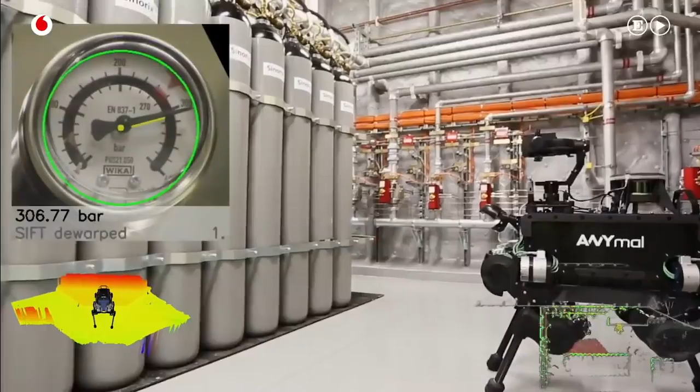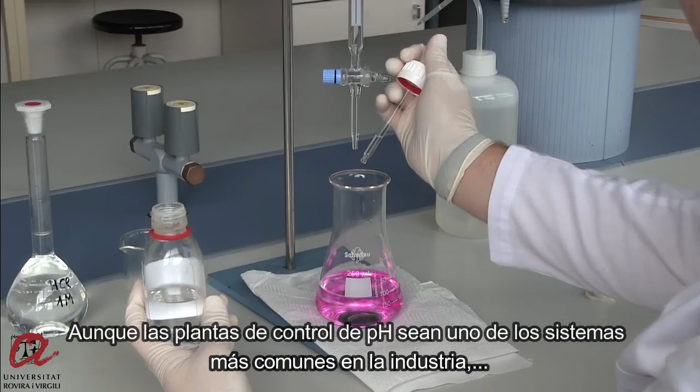Control engineering is characterized not only by its precision in assembling complex physical systems, but also by its capacity for simplification. Although pH control plants are one of the most common systems in the industry, they are also one of the most complex to control due to the high rate of nonlinearity.

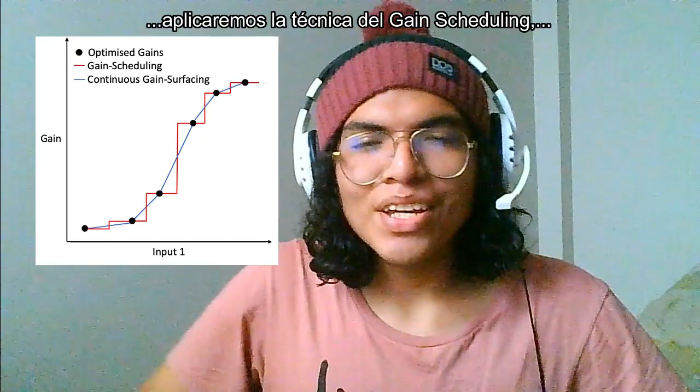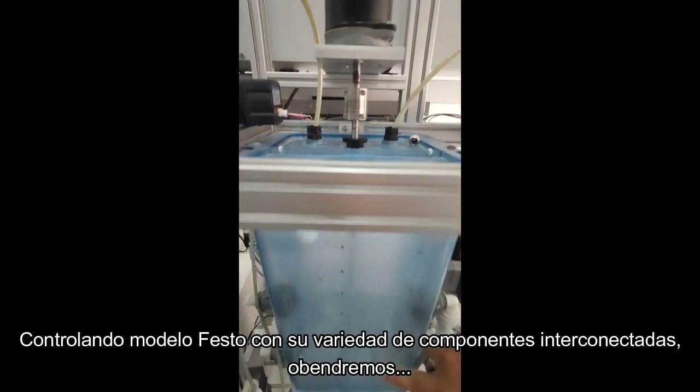Hi, I'm Axel, and in the present work we will apply the gain scheduling technique used for nonlinear systems. We will design a PID controller that allows us to work in any range, by controlling a Festo prototype, which with its variety of interconnected devices, will let us obtain this particular model. But before everything, what is gain scheduling?

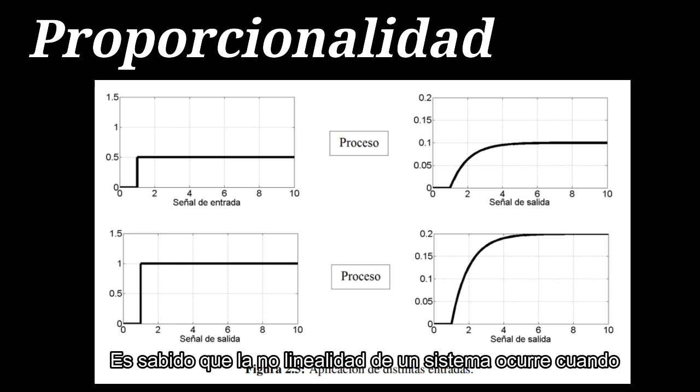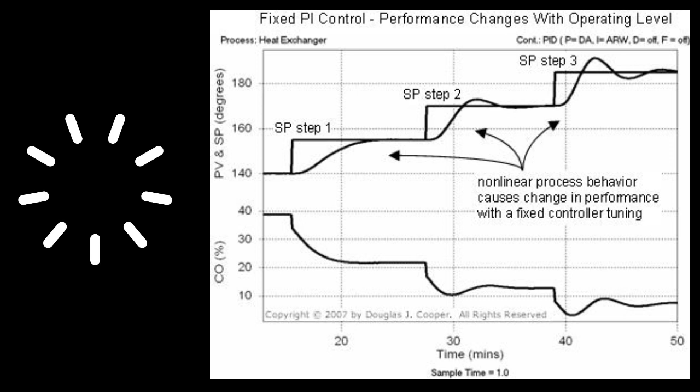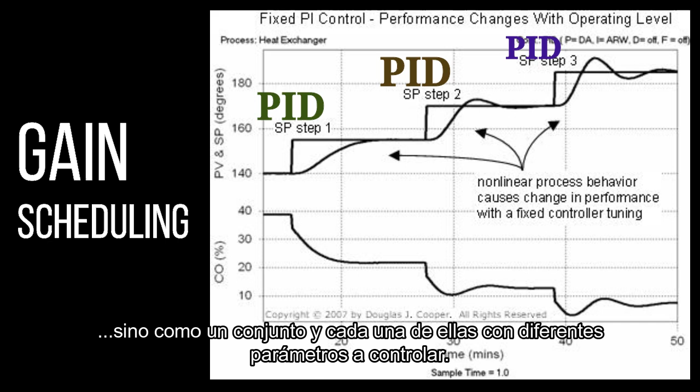It is known that nonlinearity of a system occurs when the system output does not respond in the same way to inputs of equal size, making it difficult to design a PID controller. Gain scheduling proposes that in the linear zones we should not work in a single one, but as a set, and each one of them with different parameters to control it. That is why we will divide into 5 zones, and depending on our input step, our system will place us in one of them.

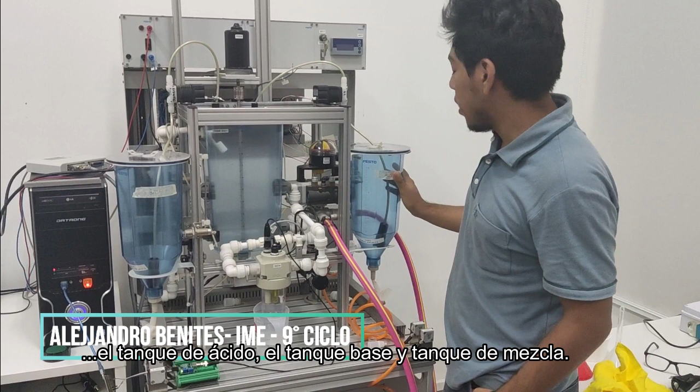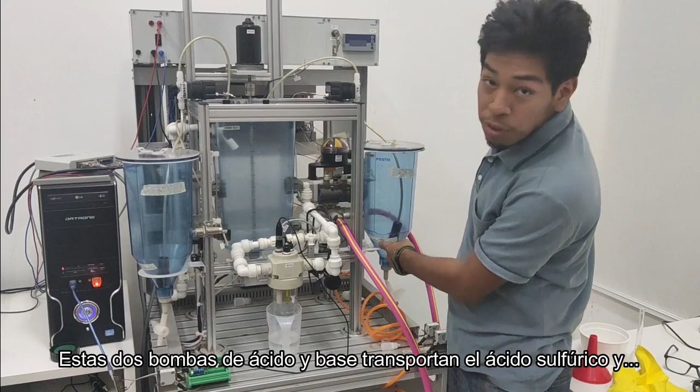Our model consists of several elements. The ones we will use are the acid tank, the base tank, the mixing tank, the stirring motor, the reflux pump, the drain valve, and the pressure sensor that is below the tank. These two pumps, the acid pump and the base pump, will transport the sulfuric acid and the caustic soda inside the liquid tank. These two pumps can be controlled with a digital signal.

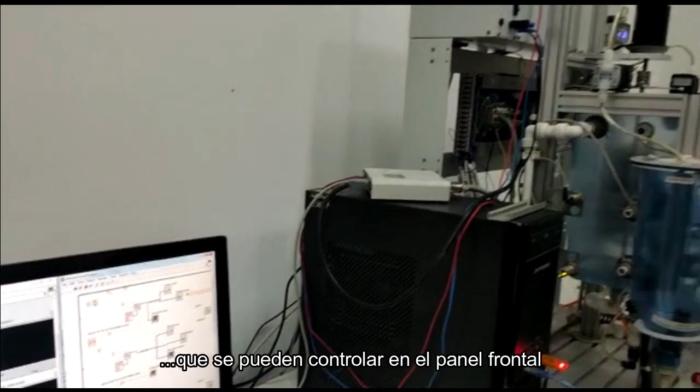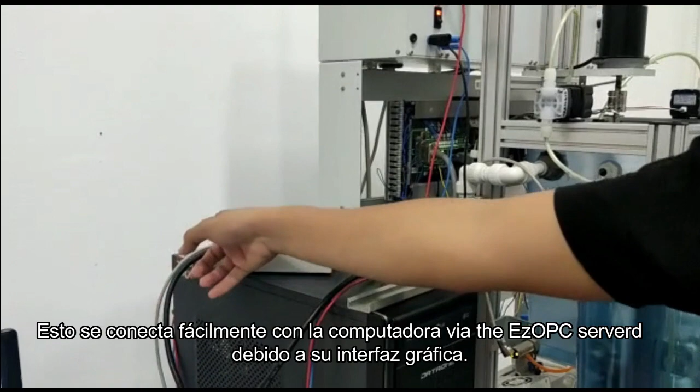All these components can be controlled and read by LabVIEW, a software that makes it possible to create graphic designs with various instructions, which can be controlled with a front panel. Finally, we use the EasyPort, which allows a bidirectional transmission of signals between LabVIEW and the Festo module. This is easily connected on the computer via the EzOPC server with a graphical interface.

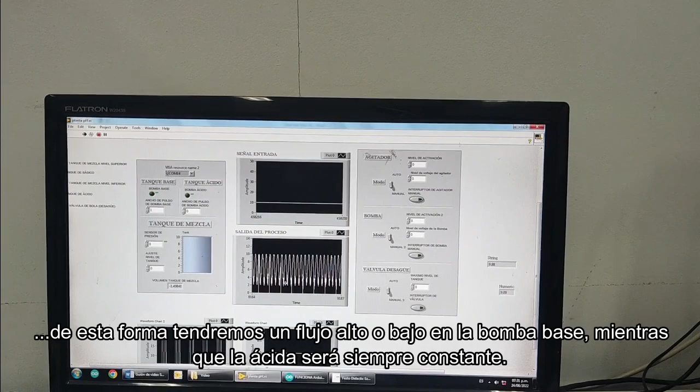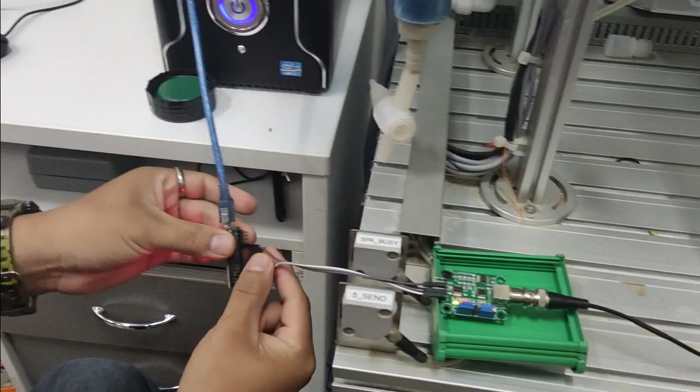For the input signal, we will control the pulse width of the digital output. In this way, we will have a high or low flow in the base pump, while the acid pump will always be constant. And the output signal, which will be read by the pH sensor, which was previously calibrated, will send the data in bits to the Arduino Nano, which converts it into voltage and then into pH.

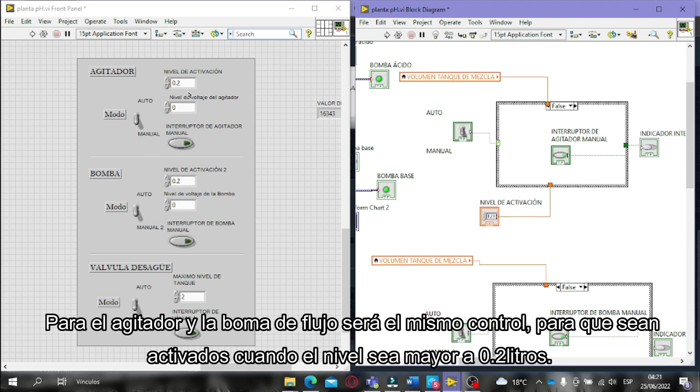In LabVIEW, we will program the drain valve with a control knob for a constant flow for 2 liters. For the stirrer and pump, it will be the same control, but intended to be activated when it detects a level of 0.2 liters.

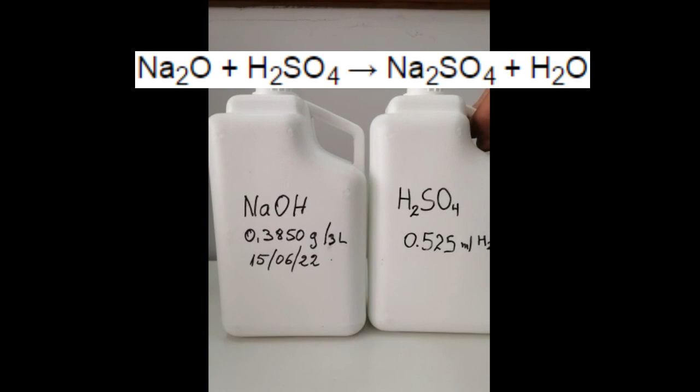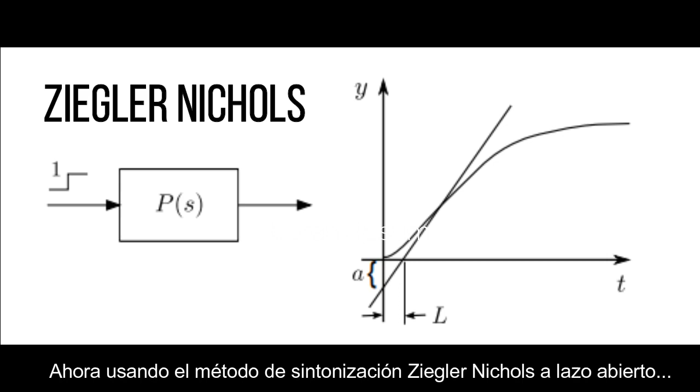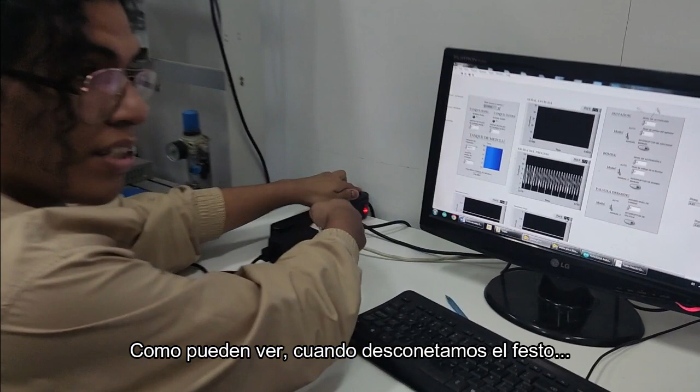At the time of taking measurements, our graph presented an abnormal signal too large to be noise. For this reason, we looked at other devices that could cause it. Finally, we found that there was a dielectric failure in the Festo itself. As you can see, when I disconnect the Festo, the signal stabilizes.

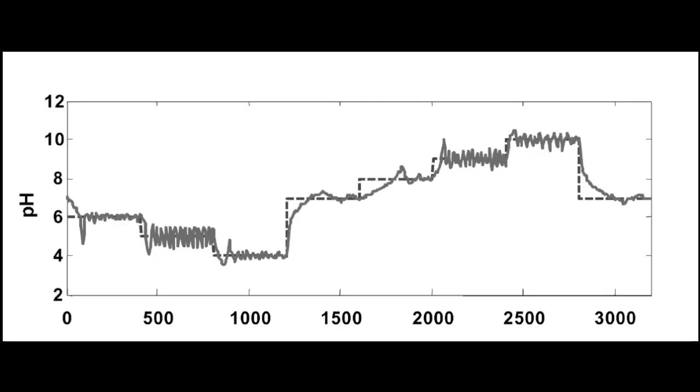It is important to calibrate the measuring instrument and understand the behavior of the measured signal. This allows us to estimate the integrity of the instrument and the reliability of the measurement. Although the graph shows values that seem to oscillate around one value and have a linear behavior, this is not the case, because the pH changes abruptly with any variation in the fluid.